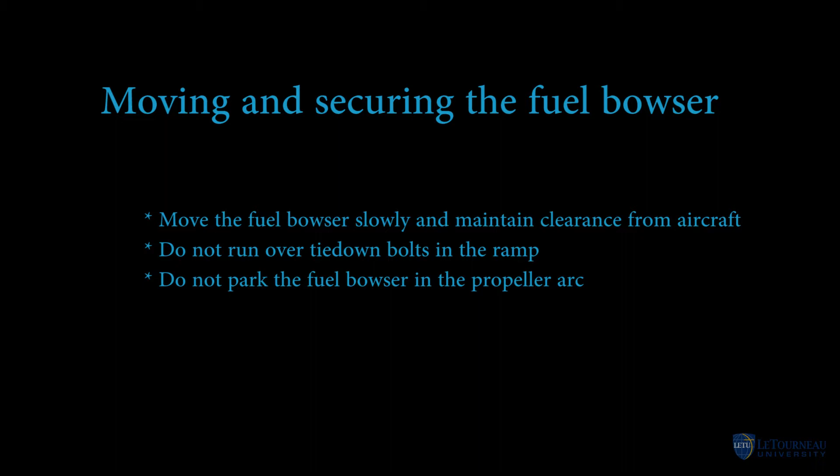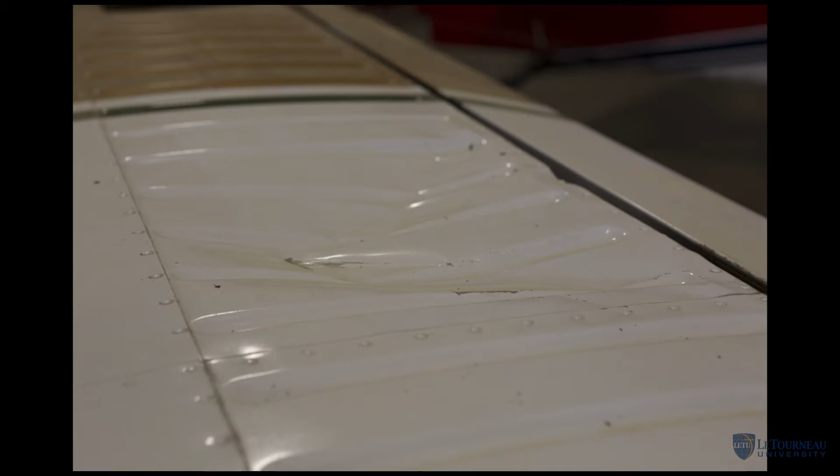Moving and securing the fuel bowser. Move the fuel bowser slowly and maintain clearance from aircraft. This is an example of what can happen when you do not control the speed of the fuel bowser and allow it to go too fast.

Remember, the bowser can weigh over 800 pounds when it's fully fueled up to the top. And this airplane was damaged when someone was pushing the fuel bowser too quickly and it began to get away from them, spun around, and ended up impacting underneath the horizontal stabilator on the Piper Arrow. So please make sure you're moving the bowser carefully and slowly at all times.

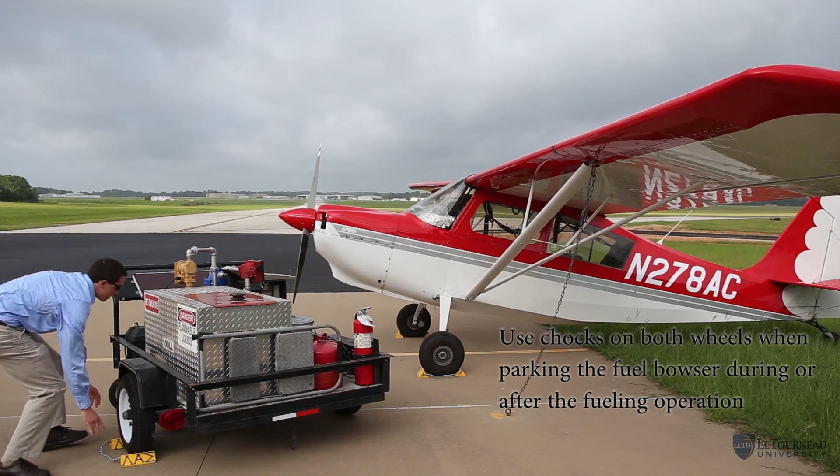Do not run over tie-down bolts in the ramp. And make sure not to park in the propeller arc. Use chocks on both wheels when parking the fuel bowser during or after the fueling operation.

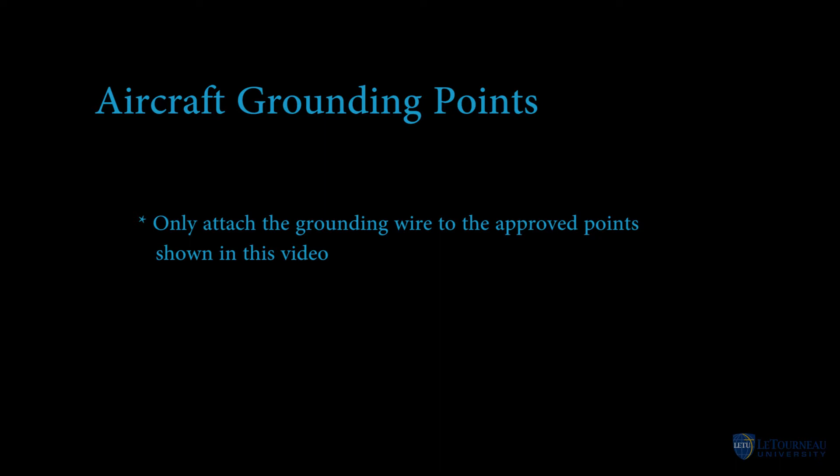There are several aircraft grounding points which you should know. Make sure only to attach the grounding wire to the approved points shown in this video for your aircraft. This is an example of an incorrect grounding point for the Citabria. And here is another example. The location for the Citabria is the main wheel axle mount bolts.

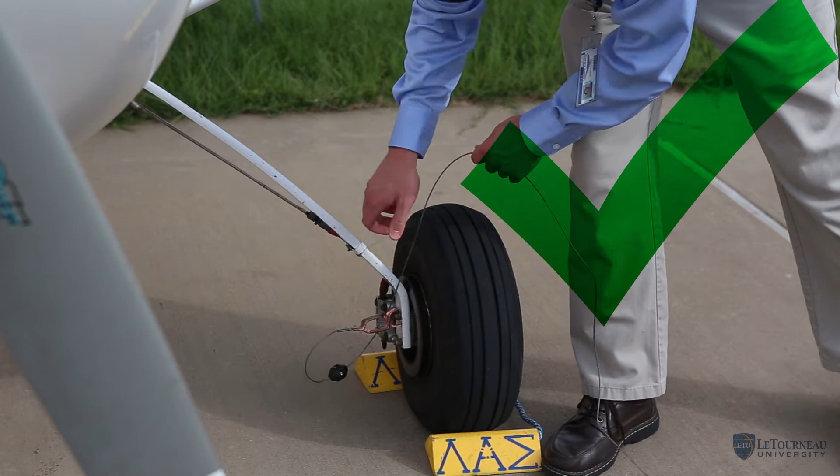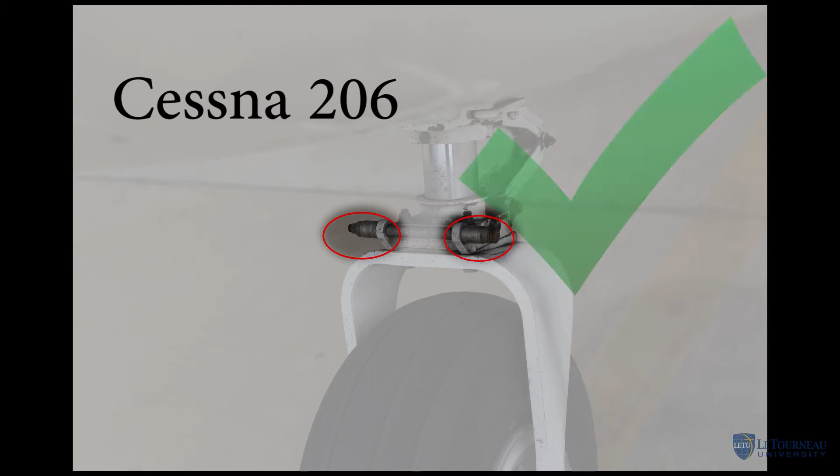On the Piper Arrow, make sure to ground the aircraft on the wing tie-down ring. On the Cessna 206, use the tow bar connection points on the nose gear. On the Twin Star, use the muffler beneath both engines. On the Skyhawk, use the tie-down ring on the wing.

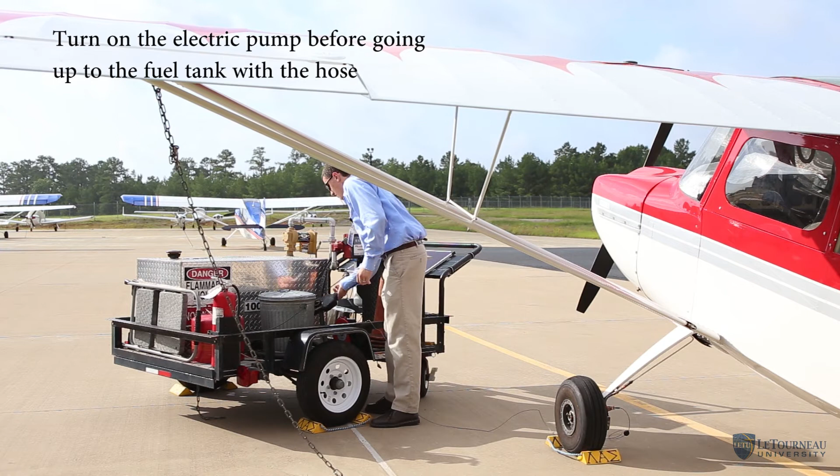Use the fuel mat on the wing. Turn on the electric pump on the bowser before going up to the fuel tank with the hose. Touch the filler port with the fueling nozzle. Make sure to keep it in contact with the filler port during fueling. Keep the nozzle inside the tank when fueling, and make sure not to rest the nozzle on the bottom of the tank as this can damage the tank.

When finished fueling, visually look or dip the tanks to make certain that you've put the desired quantity of fuel into the airplane. Turn off the pump after fueling.

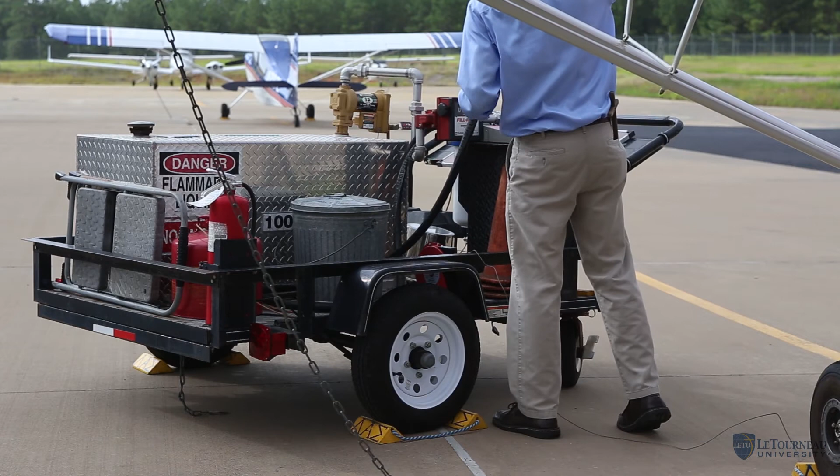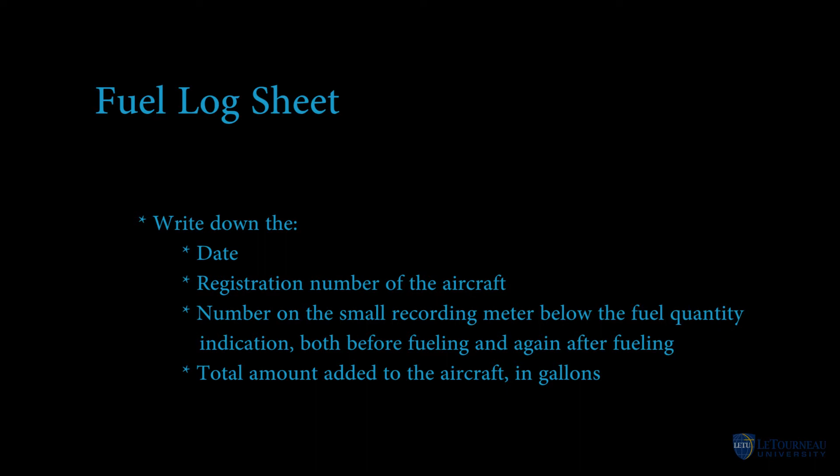On the fuel log sheet, write down the date, the registration number of the aircraft, the number on the small recording meter below the fuel quantity indication, both before fueling and again after fueling, and the total amount added to the aircraft in gallons. Here is the fuel meter and the number you should record off the fuel meter. Turn the fuel meter knob to reset the meter back to 0 after each fueling operation.

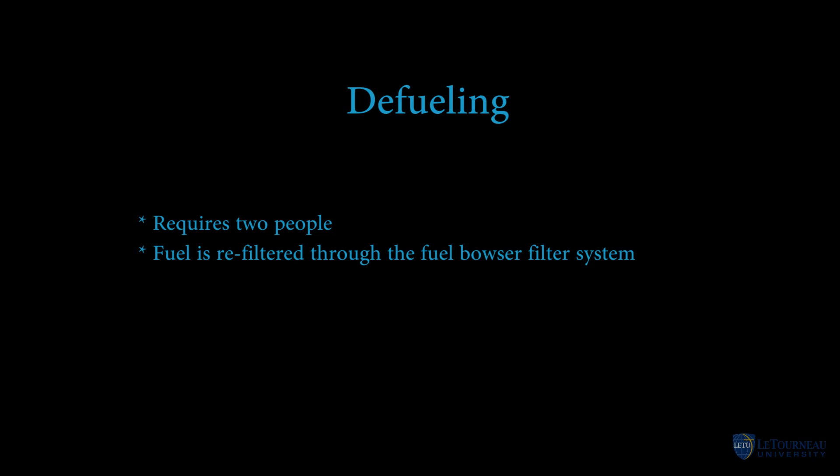Defueling always requires 2 people when students are defueling the aircraft. Because fuel is refiltered through the fuel bowser filter system, there is no need to use the filtering funnel. Insert one end of the hose into the fuel bowser. The person at the wing of the aircraft removing fuel from the tank then will put the other end of the hose into the aircraft fuel tank.

Move the hose in and out of the aircraft's fuel tank near the fuel level to get the fuel flowing. Using a dipstick, as fuel is removed, periodically check the quantity of fuel remaining in the aircraft's tanks. On the fuel log sheet for defueling, write the date, the registration number of the aircraft, the word defueling in the places for meter reading, and the amount of fuel removed from the aircraft in gallons.

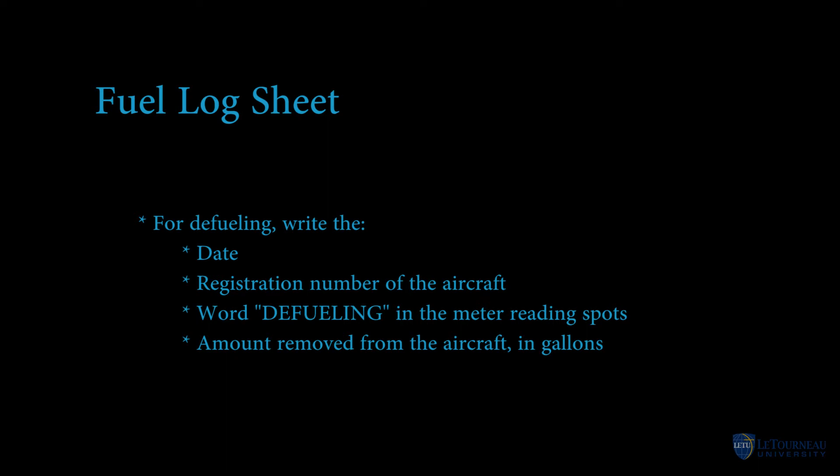Fuel spill prevention. The auto shutoff feature of the nozzle assists us in spill prevention. Make sure you monitor the flow rate and slow the flow rate as the tank nears being full. Make sure you do not squeeze the nozzle while positioning the nozzle near the tank or while climbing up to fuel the airplane. If you need help, stop the operation and ask someone to assist you.

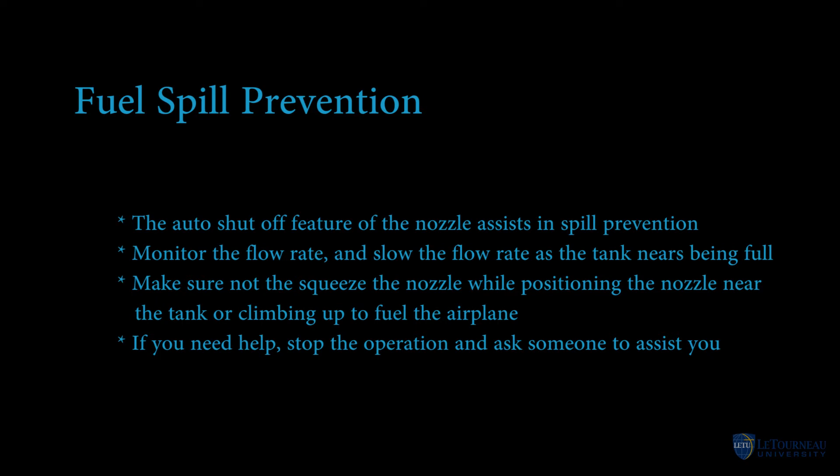Fall prevention. Use a stepladder if you cannot comfortably see inside the tank during the fueling operation. The stepladder is kept on the fuel bowser at all times. Only use the designated foot and handholds of the aircraft or stand on the tire of the aircraft if the aircraft does not have foot or handholds.

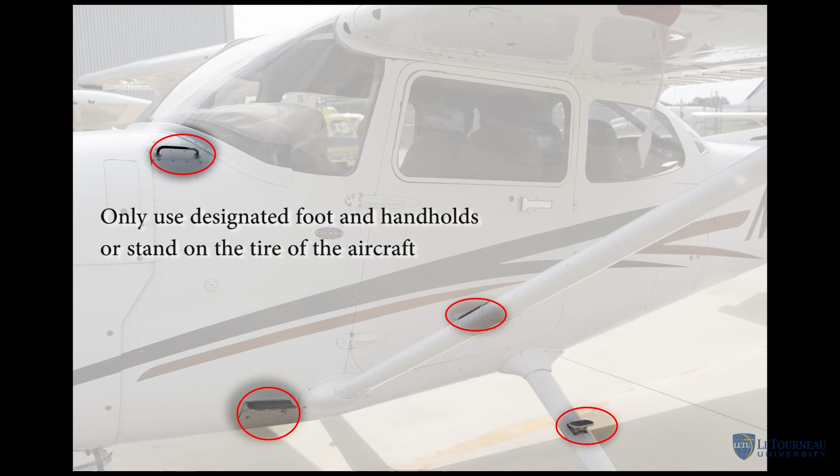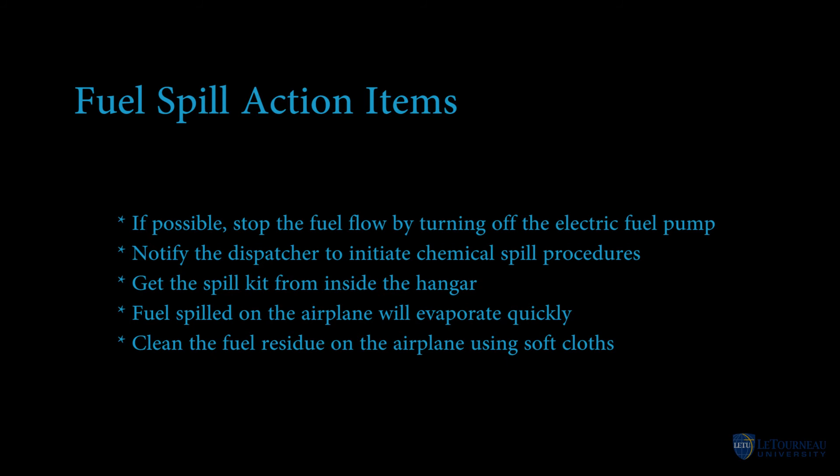If fuel has spilled on the aircraft, it will evaporate quickly, so clean the fuel residue on the airplane using soft cloths once the fuel has evaporated. If the fuel spill is too large to be accommodated by the spill kit, the dispatcher will continue the chemical spill procedure and you should evacuate the area.

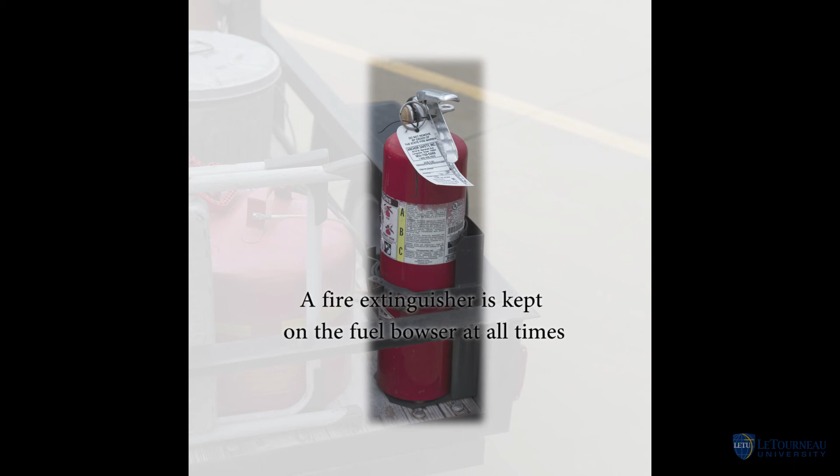Fire extinguisher use. A fire extinguisher is kept on the fuel bowser at all times. To use the fire extinguisher, utilize the PASS acronym. Pull the pin out from the fire extinguisher handle. Aim the fire extinguisher at the base of the fire. Squeeze the handle of the fire extinguisher and sweep back and forth at the base of the fire to extinguish the fire.

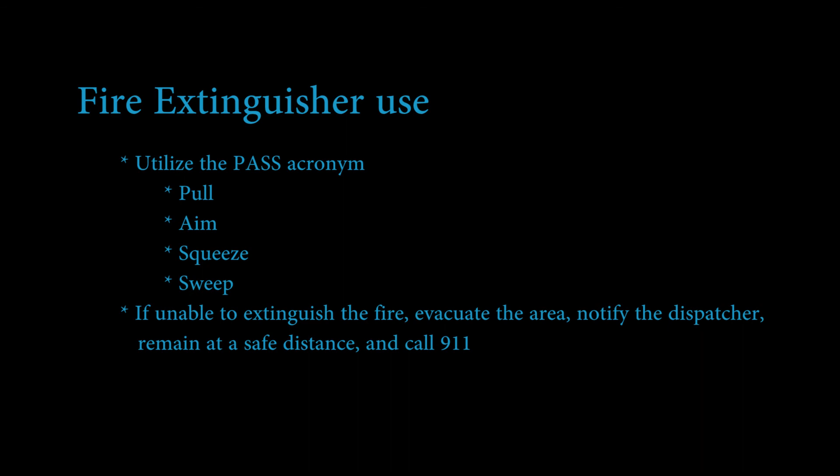If you are unable to extinguish the fire, evacuate the area and immediately notify the dispatcher. Remain at a safe distance and call 911 if the dispatcher has not already done so.

Remember that completion of the fuel training program requires that you meet with your flight instructor for a review of all the fueling training. Once this review is complete, your flight instructor will complete the training form, which will allow you to fuel aircraft on your own once you have demonstrated understanding of all of the items covered in this video.